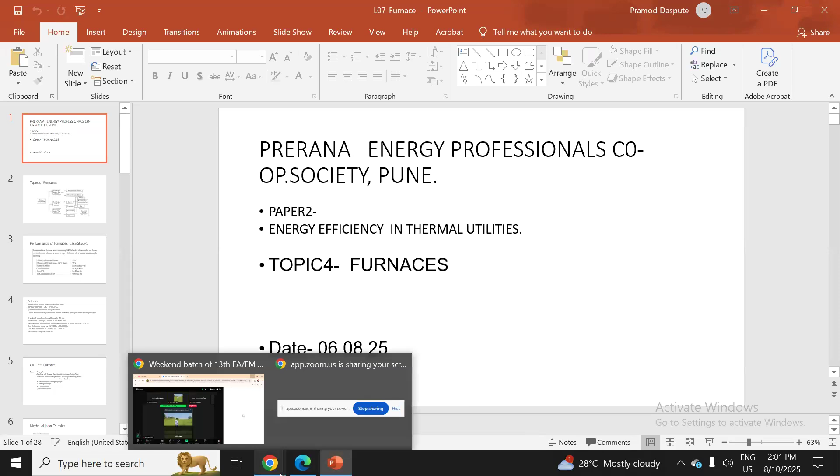Yes, Suresh ji. Hello, I'm audible and the PPT is visible. You are audible too, and the PPT is now visible. Let me know when to start since I have the PPT in front of me. We will wait a couple of minutes because a participant is yet to join. Okay, no issue.

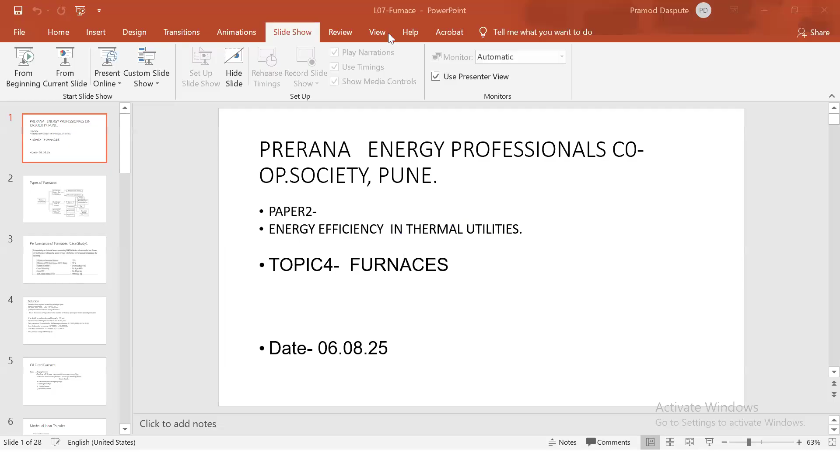Yes, Mr. Suresh, we will now start. Hello. Yes sir, we can start. I think meanwhile the participant will join. Right, right, right, we will start sir.

So today we are going to cover this topic, furnaces, in paper 2. Till this moment we have completed boilers, fuels and combustion, and boiler and steam systems. These three topics we have covered. Now today we are reaching topic 4 of paper 2, furnaces.

I have made it clear in my previous lectures that boiler and furnace are quite identical, except the fluid water is not used and there's no question of steam formation. But you can get very high temperatures. If you take the example of the steel industry, they use electrical arc furnaces called EAF, widely used in steel industry. So all such furnaces can generate a temperature of more than 1500 degrees.

You might remember that steel melts at around 1539 degrees centigrade, what is called the ACM temperature of steel melting, as related to production metallurgy, metallurgical engineering, or material science. If you remember the iron carbon equilibrium diagram for melting of steel, you will get back that steel has to be heated to 1539 degrees centigrade for getting it melted, and again for reshaping it. Scrap melting also needs this type of temperature.

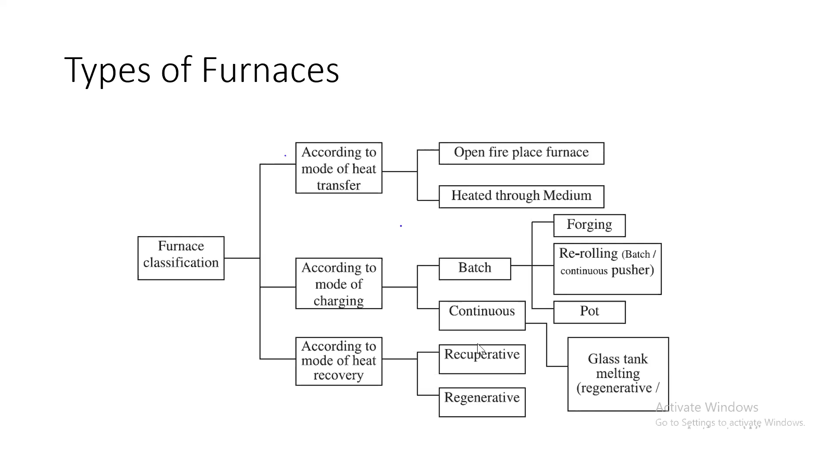So I have initially put up a case study for your reference.

Suresh, many people have joined now. Two, three people have joined. No? Already sir, five have joined. So the total is six. Nice, very nice, very nice. Because I'm starting a case study, so everyone should be able to join it.

Right sir, okay. So this is a case study for furnace, and this is probably a numerical problem asked for around 10 or 20 marks. I don't exactly remember, but mostly 10 marks. And it is a very good question. I liked it, so I attempted it to put in my PPT.

So try to understand this particular philosophy of a furnace, where an electrical furnace is being decided to be replaced with a fuel fired furnace or furnace oil fired furnace. The matter is that simple.

Electrical furnace consumes 50 kWh per batch. For our simple understanding, we can say that is 50 units per batch. So 50 kWh units are consumed in a single batch, and that furnace is to be converted into a furnace oil fired furnace.

So we have to estimate the annual saving when it is replaced with furnace oil, considering the following: the cost of FO, the cost of electricity, the efficiency in both cases - all such data is given here. If it is the electrically operated furnace, the efficiency is 75%. Now if you decide to go for FO fired furnace, the efficiency is 52%.

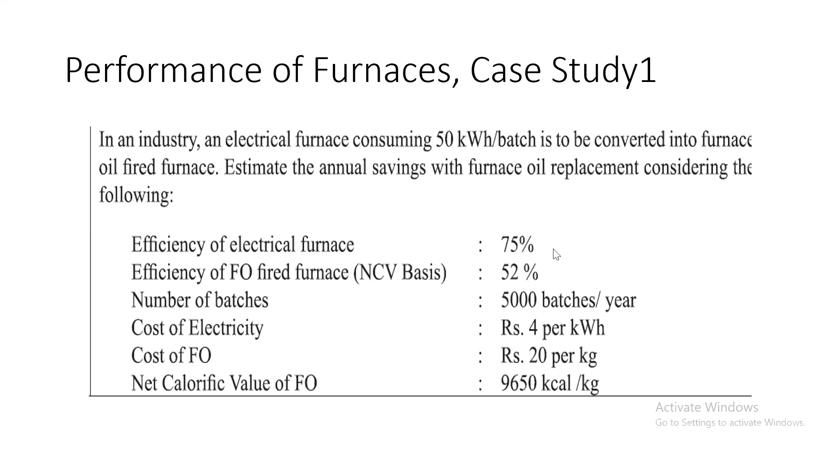Okay, this is what I was trying to convince you. So electrical heat available for melting in kilocalorie per year is 50 into 5,000 into 860 into 0.75. This equals 1.612 into 10 raised to 8 kilocalorie per year. This is the annual heat available to the process.

I have written all the units: 50 kWh per batch, 5,000 is number of batches per year, 860 is the conversion factor to kilocalorie, and the efficiency factor. So you get 1.612 into 10 raised to 8 kilocalorie per year. This is the amount of input heat to be supplied for heating in 1 year for the desired production.

Now the electrical part is essentially over as far as the performance is concerned. The amount of heat input is clear to us, and the amount of heat available to us throughout the year, considering the efficiency part for the process, is now clear. Now we go to the FO part.

For the FO part, you will require this much amount of heat for the process, but efficiency will be 52%. So we have to organize FO such that this much heat is available throughout the year. Though actual heat available is 1.612, the actual heat required for the process is this - we will need to supply this much heat because of the efficiency part.

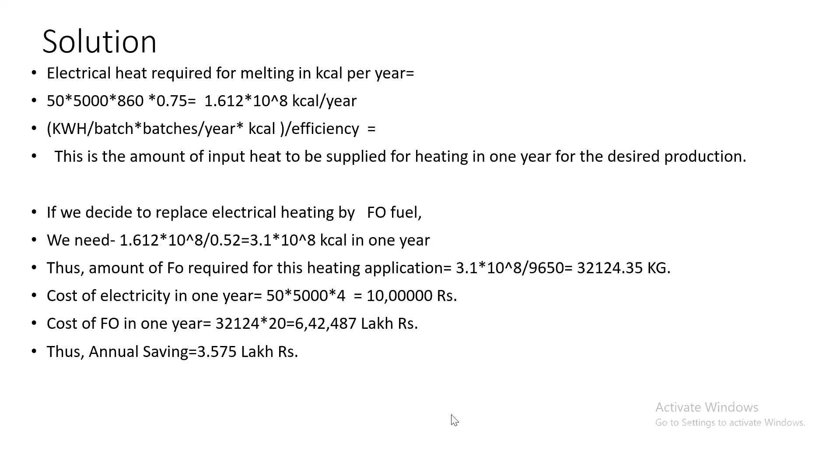Now we will understand various types of furnaces. Actually, all these oil fired furnaces, whether FO or LDO or even CNG, are the types of furnaces used, and there is a detailed study given in the book, but they rarely ask about the working of these furnaces. So I have not repeated all these theory topics, but you can go through the figures given in the book in detail and try to understand how the furnaces work. If you don't understand anything, you are always welcome to ask me your doubts.

So the types of oil fired furnaces used are forging furnace, re-rolling mill furnace, continuous steel reheating furnace. It can be pusher type or walking hearth type, rotary hearth type, continuous recirculating bogie type furnace like a railway bogie, walking beam type, cupola furnace, and induction furnace.

You would remember that this cupola furnace is there even in the high school syllabus for steel melting. In chemistry or physics, they teach that raw iron in the form of pig iron can be melted in a cupola furnace or blast furnace. So that is a basic furnace.

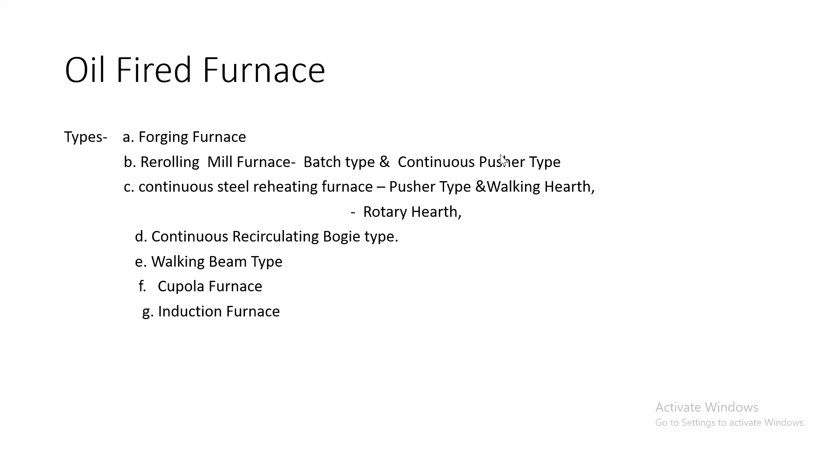We'll go to the modes of heat transfer. One thing we need to be very clear about is that the burner flame has to be very precise, that it should not touch the walls or the roof of the furnace, or even the metal stock which keeps moving on the conveyor.

So let us say above here the steel stock is there, and here the conveyor is there, where the metal keeps moving depending on requirement. So that particular metal to be heated will not directly come in contact with the flame. If it directly comes into contact, the flame may corrode the metal, or damage it, or spoil its properties. So the intention is that the flame of the furnace should not be in direct contact with the metal to be melted.

The main ways in which heat is transferred to the steel in a reheating furnace are shown here. Heat is transferred to the metal stock by radiation from the flame, radiation in the form of electromagnetic waves, hot combustion products, and the furnace walls and roof. So ultimately these walls and roof become very hot because of the high temperature. Then the radiation heat keeps passing, so ultimately the metal keeps getting heated.

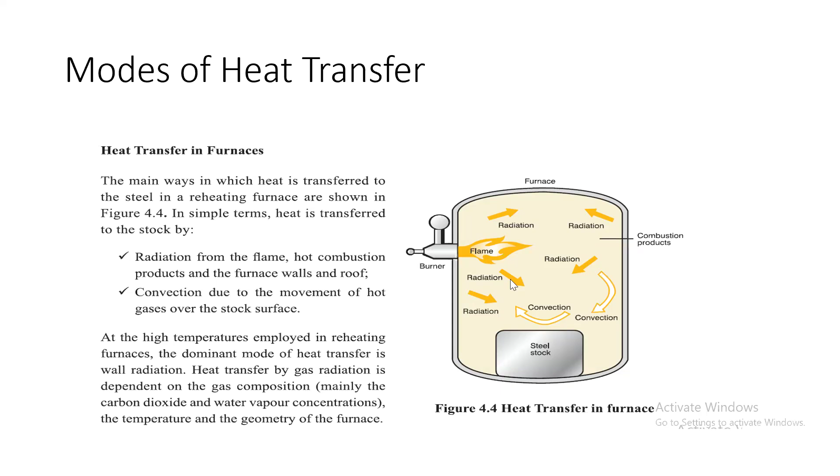Now we will discuss how to find out the performance of an electrical furnace. And here again the things are quite simple. Efficiency is equal to theoretical heat required in kWh divided by actual electricity consumed for melting. So it is equal to HT upon HA, that is theoretical heat upon actual heat.

This formula is very common in a boiler topic also for percentage CO2: the formula of theoretical CO2 percent divided by actual CO2 percent. Same way here, theoretical total heat required for melting divided by actual electricity consumed for melting.

So theoretical heat required for melting is, again the same thing, mCp delta T, which is already well known to us. So m is mass of metal, Wm, or you can say weight of metal, into Cp into delta T, plus H is included. This H should have a suffix called Fg, that is latent enthalpy.

So this becomes a sensible part, where the heat is being transferred from one temperature to another, and latent part gets added with the help of Hfg. So if the latent heat is required for the process, then this H has to be used. And all this, mCp delta T plus latent heat, divided by 3600, will give you your answer in kWh.

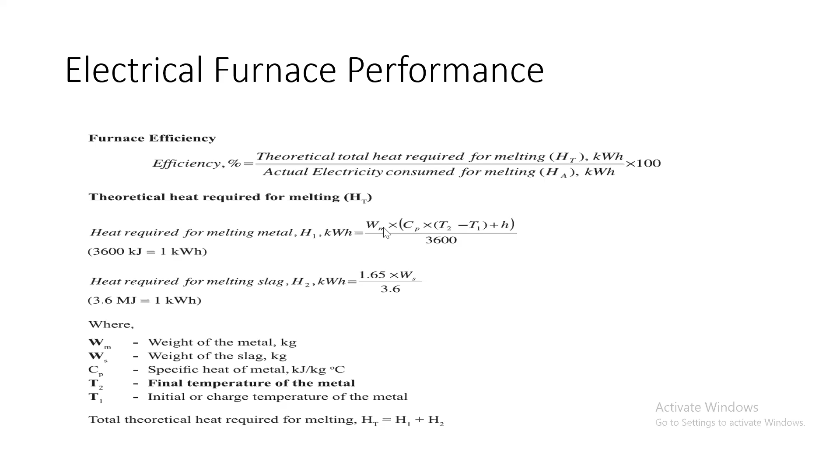That is why the loss in induction furnace is expressed here in percentages, and you can guess that electrical furnace efficiency is somewhere around 70%. The lost heat is approximately 30%, and that analysis is given here.

So electrical furnaces can be broadly classified as induction and arc furnace, such as for steel. For steel, obviously arc furnace is used, that is why the term EAF has come into picture. And resistance furnace is used specifically only for heating, not for melting. This concept should be clear.

When you call it resistance heating, it is just to provide heat up to a given temperature. But if you want to melt, or provide heat till the entire metal gets melted, you have to use induction or arc furnace. So for steel melting, arc furnace is used.

Now the losses in induction furnace - the theoretical energy required to melt 1 ton of steel is around 400 kWh per ton. If you visit steel plants nowadays, every plant declares the amount of electrical energy required per ton of scrap melting. Many cases I have read 420 or 430 kWh per ton, in some cases around 390 kWh per ton. So the theoretical energy required to melt 1 ton of steel is in this range.

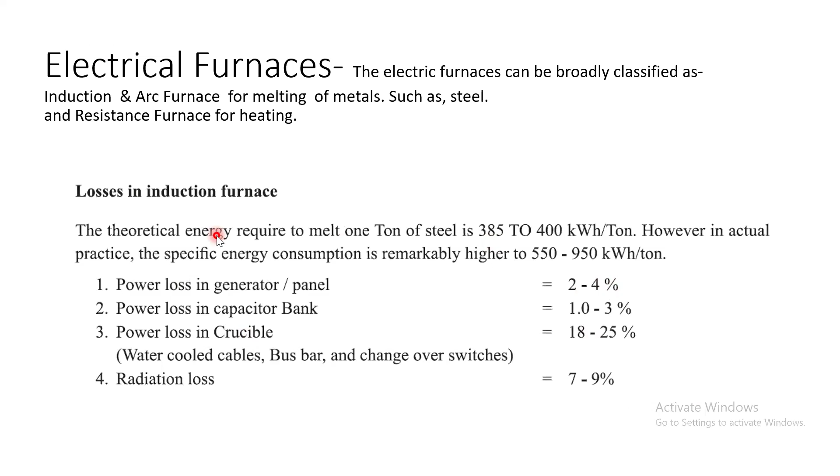Does anyone know what a Sankey diagram is? Any idea about Sankey diagram? Yes sir, yes sir, we have. Very good. Again we may come across the Sankey diagram for furnaces in the next PPT.

Now, performance evaluation of fuel fired furnaces. Why is the efficiency lower in fuel fired furnaces like FO, and why is the efficiency of electrical furnaces around 70%, but for FO, LDO, the efficiency is around 50% or even less? What are those reasons? The stack temperature is quite high, up to 700 or 800 degrees centigrade, and air levels are excess - we know excess O2 is used for combustion, which we have learned in boiler also.

Then capacity utilization is low - suppose if the furnace is capable of melting 1000 kg, but because of restrictions from customers or clients, you could put only 700 kg or 500 kg. So ultimately capacity utilization is up to 70% or 50%, and this low capacity utilization results in low furnace efficiency. High stack temperature also results in low furnace efficiency.

Because that stack gas temperature can be used effectively for preheating the air if you just add one heat exchanger, where heat transfer will take place between the air and the flue gases going to waste.

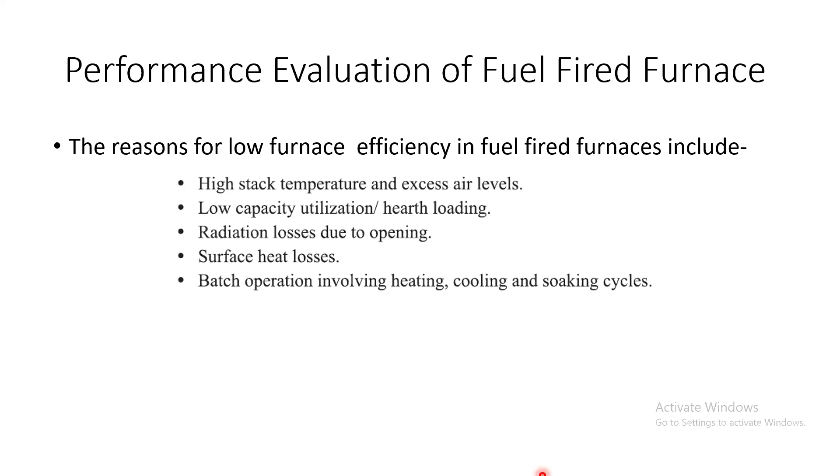Now this is the Sankey diagram which I was trying to explain in the previous slide. I have informed you about various losses in the furnace, which are listed here and shown in this diagram. The gross fuel input given by mass of fuel and calorific value is shown here. This gross fuel input gets reduced to net fuel input because of moisture content. So your net fuel input is this much, and that results into this much available heat, which is further reduced, and that available heat goes to useful output.

Then where is the rest of the energy? This is an accounting of furnaces, so where does the rest of the heat go? The heat goes majorly to the flue gases. We have all come across this in boilers also. A lot of heat is taken away by the dry flue gases, and that is nothing but flue losses. So in every problem of furnace analysis or boiler analysis, we have to find out the percentage of heat loss to the flue gases. This is a major heat loss going to flue gases.

Another heat loss is the loss in the walls. The wall becomes heated, and you find it very hot when you walk across this area because of the wall losses. Opening loss is also well known to you, because while loading and unloading there is a gap in the furnace, and that gap directly exposes the 1500 degree centigrade melting temperature to just atmospheric temperature.

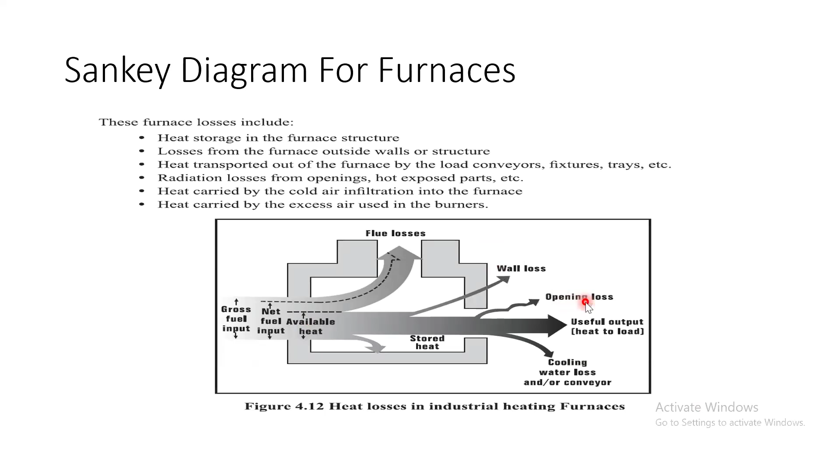So 13 lakh divided by 55 lakh will give you the efficiency of the furnace, which is equal to 25.2%. Now furnace efficiency of 25% means 75% heat is lost, lost to the flue gases, wall, opening losses, and cooling water loss and so on.

This percentage yield means what, sir? Percentage yield, yes, 92%, you are right. Now the percentage yield you are talking of is part B of the problem, this is part A. So this is just furnace efficiency. We will talk about percentage yield in part B. So furnace efficiency is simply clear to you or not? Yes sir, clear.

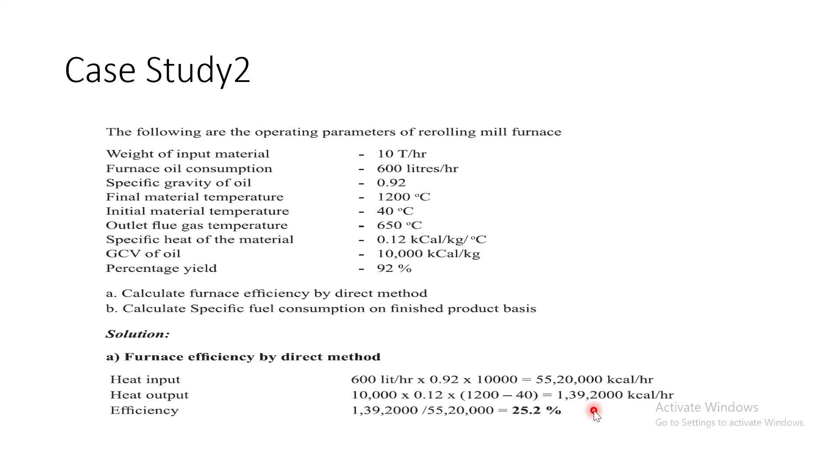Now we talk of specific fuel consumption on finished product basis. Weight of finished products is nothing but 10 ton per hour, and 92% is the percentage yield. So ultimately at the end of the process, though your input is 10 ton, you get melted metal in terms of 9.2 ton per hour. The rest of the 800 kg is nothing but slag, which we studied in the previous slide. So slag has got formed in the balance 8%, right.

Furnace oil consumption is 600 liter per hour, and this liter has to be converted into specific fuel consumption, because 600 liters of oil is required for melting 9.2 ton of effective output material. So 1 ton needs 65.2 liter of furnace oil or FO. This is how specific fuel consumption on finished product basis can be worked out. Try to understand the meaning of each term involved. Finished product is 9.2 ton per hour, which is considered here, and specific fuel consumption is nothing but 600 liters per hour, and we wanted the answer in liter per ton.

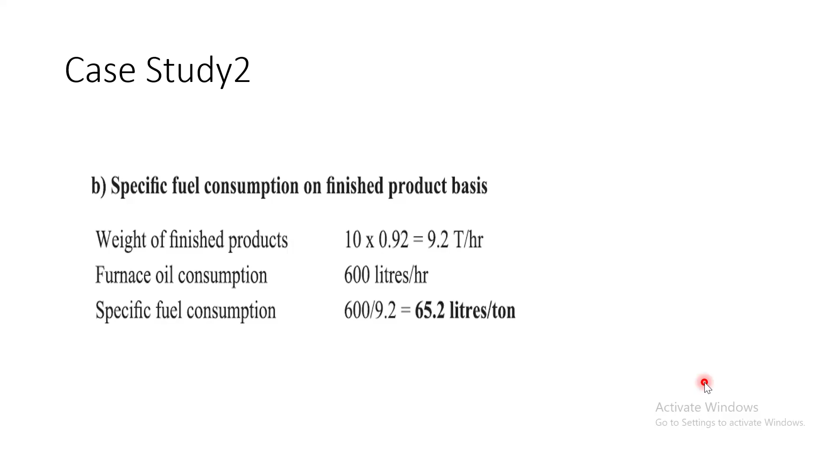Now this is one more practical slide which I specifically decided to introduce: measuring instruments for furnace performance. What are the various instruments used when you work for furnace efficiency measurement? What are the performance measurement criteria? We'll try to understand all these one by one.

Furnace instrumentation: what are the parameters to be measured? Furnace soaking zone temperature, and other parameters, are measured at specific locations. These are the instruments that are required, and the expected values are in this range. So what are the major parameters measured when furnace performance is to be measured? This is how the problem statement gets formed with the help of this particular slide.

Now you want to know the furnace temperature of the reheating furnace during soaking or during other operations. If you want to measure at the soaking zone, the location of measurement is the soaking zone side wall. If you want to measure at some other location like the input side or exit side, then that side's temperature has to be taken at that particular location. The instruments required are platinum or platinum-rhodium thermocouple with indicator and recorder. It will indicate the temperature at the required location, and it will also be recorded.

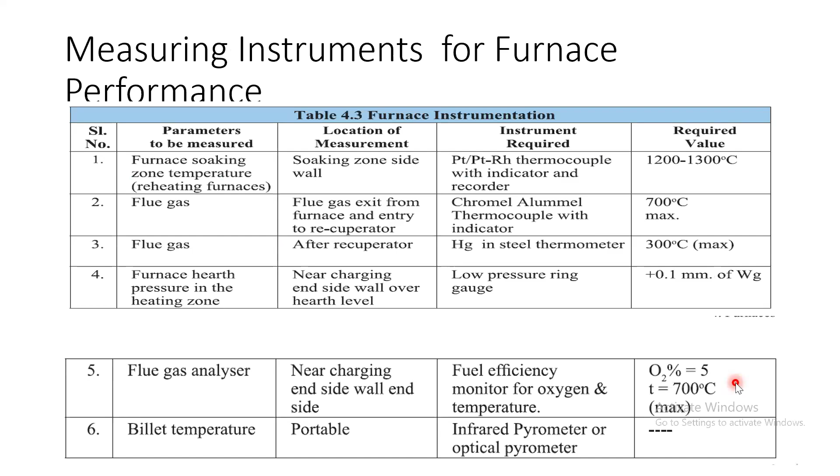The first measure is complete combustion with minimum excess air. I already told you that O2% should be much less than 5, around 3 to 5%. So that is the first measure - complete combustion with minimum excess air. Second is uniform or correct heat distribution. Third is operating the furnace at the desired temperature.

Then, reducing heat losses from furnace openings, and maintaining the correct amount of furnace draught. Draught is already known to you now - or should I explain what is draught?

Yes, think. Draught is known, no? Not known, sir. Not yet come, sir. Okay, okay.

Draught is very well required in furnaces, and boilers - both. So draught means what? The difference of pressure between the flue gas exit and the flue gases when they are inside the chimney. A draught is created when suddenly the flue gases go out to the atmosphere. So the pressure of the flue gases while going out of the chimney, and the difference in pressure when the flue gases go out of the chimney versus when they are inside the chimney - that pressure difference is called draught.

That is why the words FD fan and ID fan come into picture. ID fan is induced draft fan, FD fan is called forced draft fan. That draft word has come into picture because of the furnace draft.

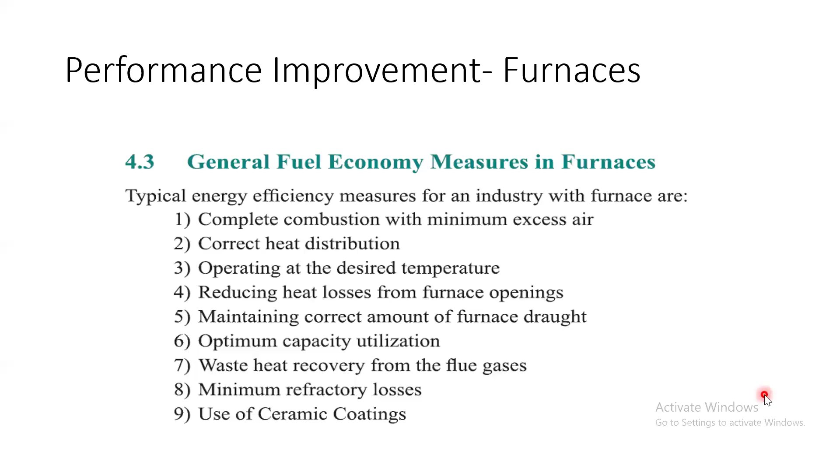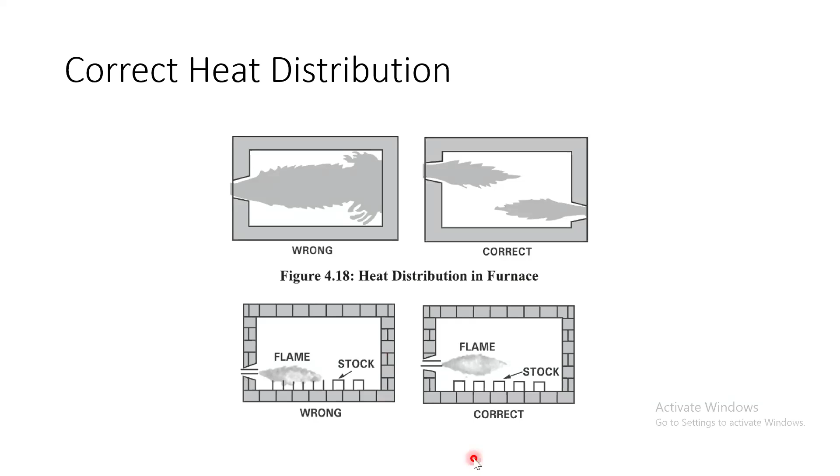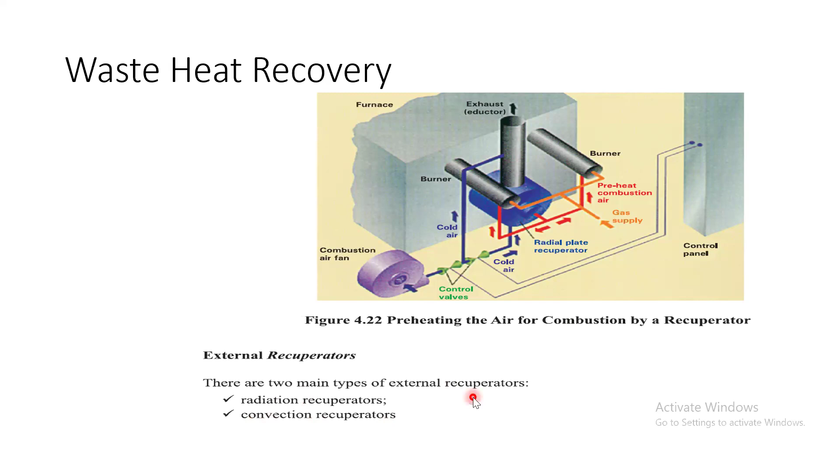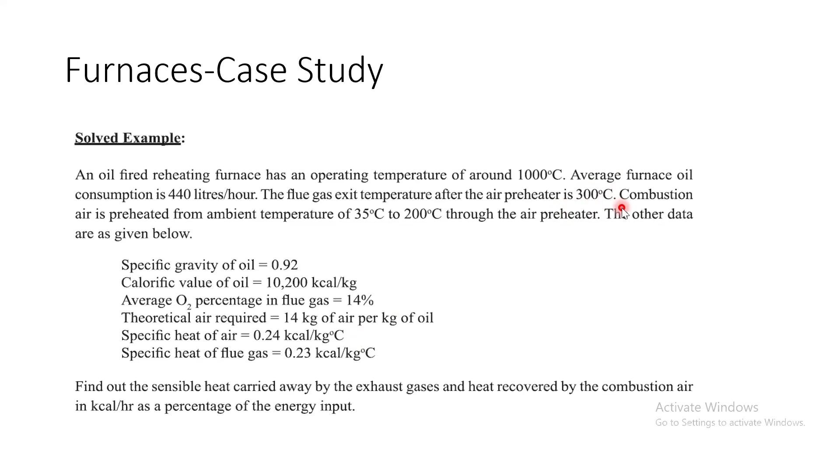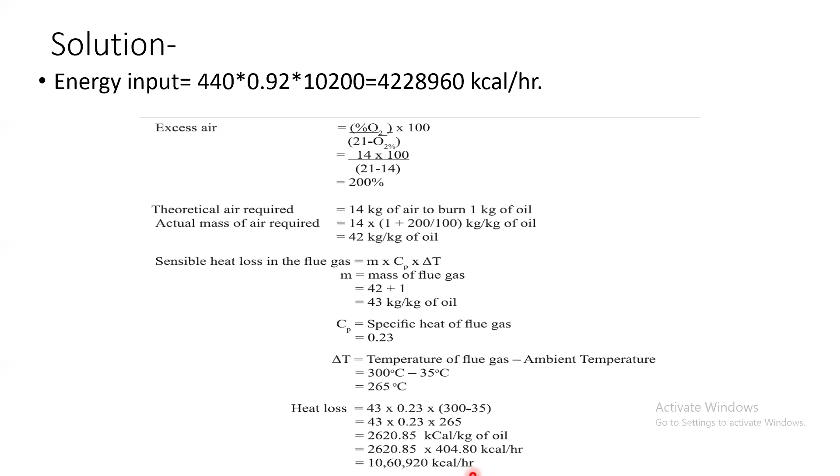That is why, in order to take advantage of the heat going out of the flue gases, they have decided to preheat the combustion air, which is preheated from 35 degrees up to 200 degrees. So you could save this much amount of heat out of 10 lakh kilocalorie going every hour.

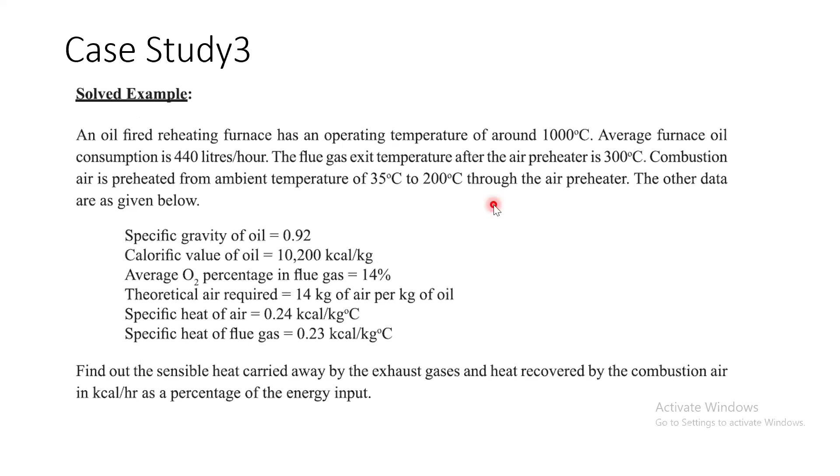Okay sir, I have three more case studies. We will go one by one. If all these three case studies are clear to you, the next will be easy. If there is any doubt, you can ask me.

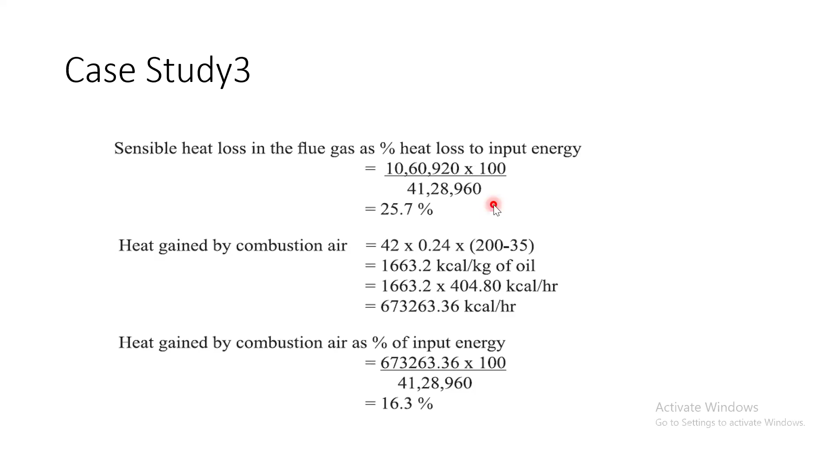I will purposely not open the next slide, and I will expect your answer to this question. Now here the concept is very clear: mass of stock is known to you, 10 ton per hour, CP of stock is given, delta T of stock is given. So you can find out MCP delta T as the heat output required, and heat input supplied is the mass of fuel, which is given to you, along with the calorific value.

Please try to find out the efficiency - your answer may be wrong. I will wait for 2 minutes. It is an objective question of 2 marks asked in the exam. If there is any doubt, you ask me, but I will not open the answer slide.

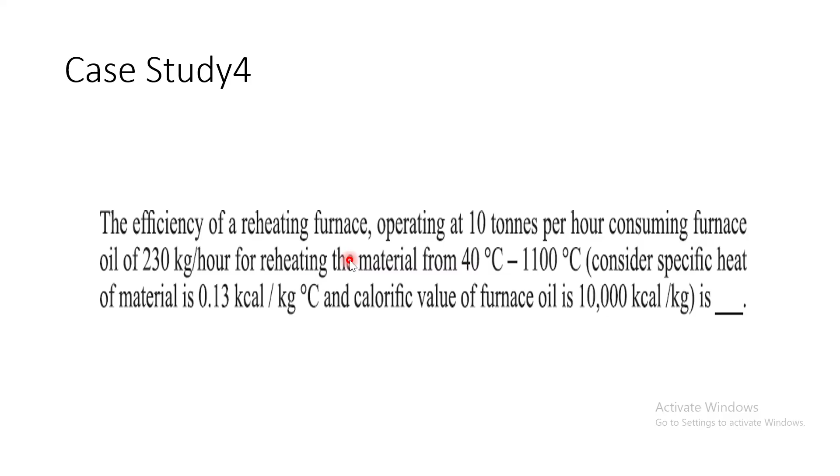Is it okay? Yes sir, can we go ahead or is someone not able to get the answer? Everyone is okay with 59.91%? Yes sir, yes sir. Those who could not get it, who have got some doubts, can see this slide for a minute, then we'll move ahead, okay? Mass of stock are the variables.

Okay, now we go to case study number 5. The efficiency of a billet heating furnace with an output of 15 ton per hour was 32%. Now efficiency is directly mentioned in this problem. Find out the specific fuel consumption in liter per ton of billet heating and total fuel consumption per hour as per the data given below. Now again it is clear that the output mass to be operated in the furnace is 15 ton per hour, and delta T for that metal to be processed is this, that is 1100 degrees centigrade, and that billet has got specific heat equal to this. So ultimately output heat required is equal to 15,000 into this difference into 0.12.

Is it clear? Now density of furnace oil is 0.95 kg per liter and GCV of furnace oil is 10,000 kilocalorie per kg. So this all is related to the furnace oil, these two parameters, and the efficiency is already mentioned. So ultimately you have to find out the mass of furnace oil being used for the process, and that has to be converted into the answer. If you get it in liters, that has to be divided by ton of billet, that is 15. So ultimately you will find out specific fuel consumption in liter per ton and then total fuel consumption per hour. So this is how you can solve this problem.

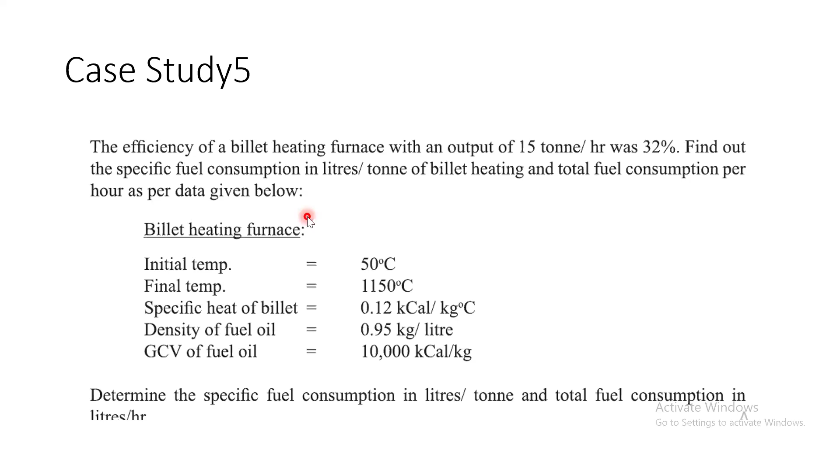And then there is one more question asked by them: total fuel consumption per hour. Have you found out fuel consumption per hour? Fuel consumption per hour is already found out: 618.75 kg per hour, isn't it? Yes, sir, that is already found out.

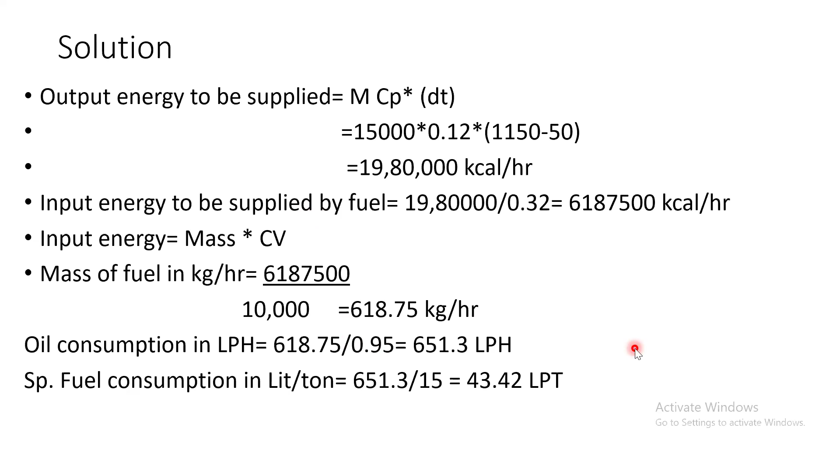Output energy to be supplied, that is important, sir. Now this problem is clear to you all? Yes, sir. Then we go to this case study number 6.

We have 6 cases to be solved. Now this is case study number 6. A furnace output is 5000 kg per hour of billets. Thermal efficiency is claimed to be 25%. Specific heat of billet is 0.12 kilocalorie per kg degree centigrade. Billet enters the furnace at 40 degrees centigrade and leaves at 1200 degrees centigrade. Calculate the hourly consumption in liter of furnace oil if GCV of the oil is 9200 kilocalorie per liter. I think this problem is not at all difficult.

If you have any difficulty, please ask me. Furnace output is 5,000 kg per hour, thermal efficiency is given. So output energy to be supplied: output energy is equal to MCP delta T. Mass 5,000, CP is 0.12, delta T is 1200 minus 40 equals 1160.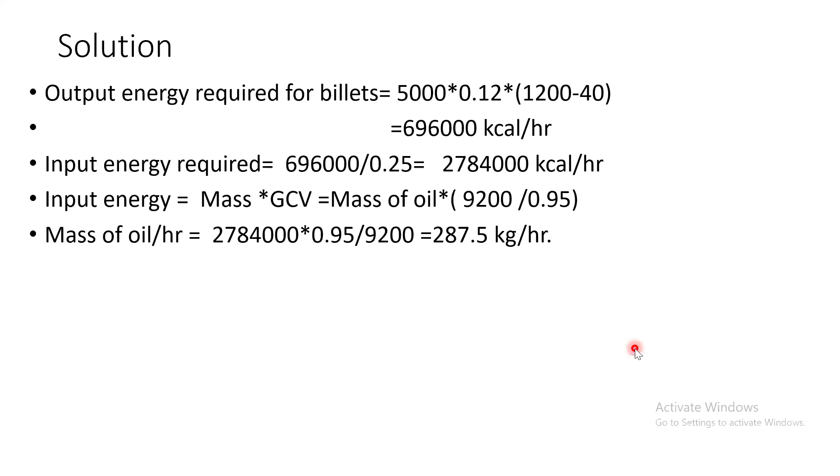Sir, this 0.95, where is it given in the problem? 0.95? No, it is assumed, density of furnace oil is 0.95. You can assume even 0.92 also, no problem. When it is not given, you have to assume it.

This problem is actually unsolved in the book. All unsolved problems in the book I have taken as case studies for your convenience, because solved problems you can copy from the book and solve them directly. But I have purposely taken unsolved problems so that your concept will be totally clear. So these are all unsolved problems, and they are expecting you to assume density of furnace oil as 0.95.

Sorry, specific gravity of furnace oil equal to 0.95. And you can clearly write, in such case we have assumed this 0.95 as the specific gravity of furnace oil. You can clearly mention that.

But if our assumption is not 0.95, suppose it is 0.94 or 0.9, then the answer will be different. All different answers are in the same range, and they accept all answers from 0.91 to 0.99 as correct. There is no accurate answer in all these exams. You must have a clear cut idea of the entire situation, that is what is expected.

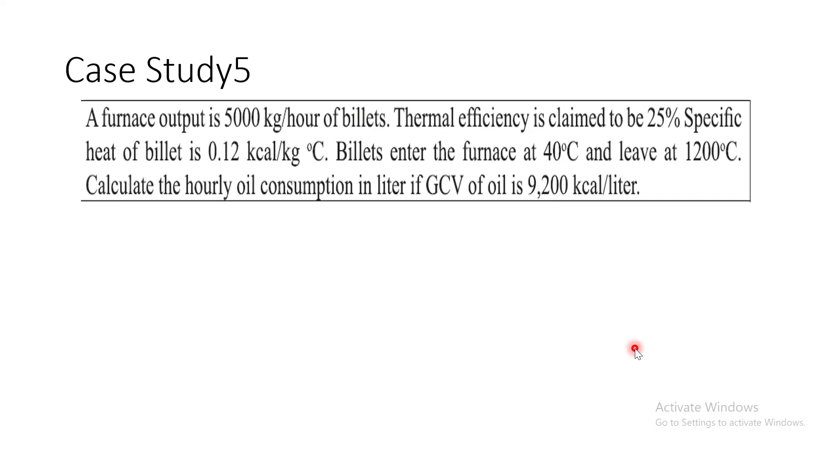Because you have been given NCV of furnace oil, liters has to be converted to kg. That is why specific gravity is also given to us.

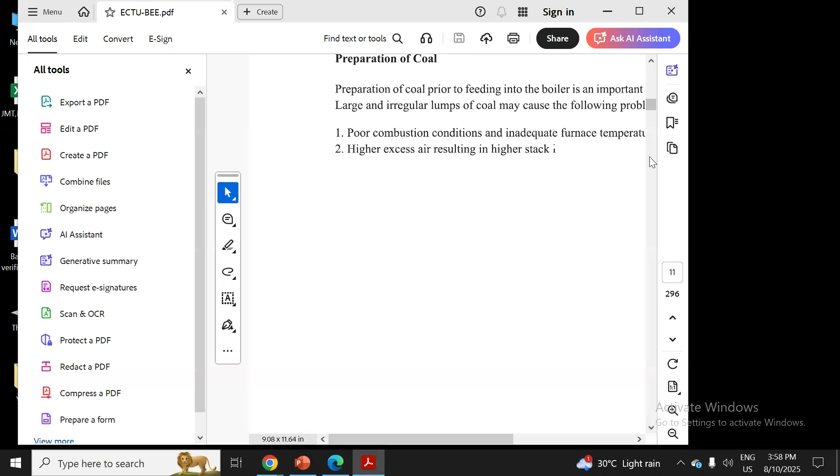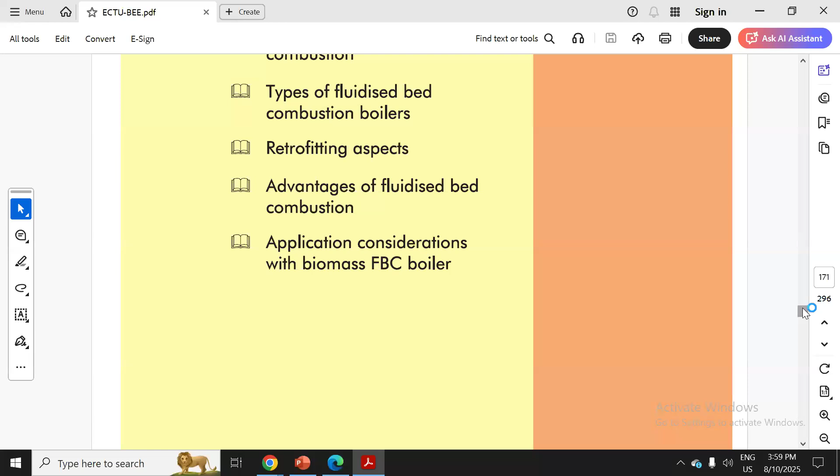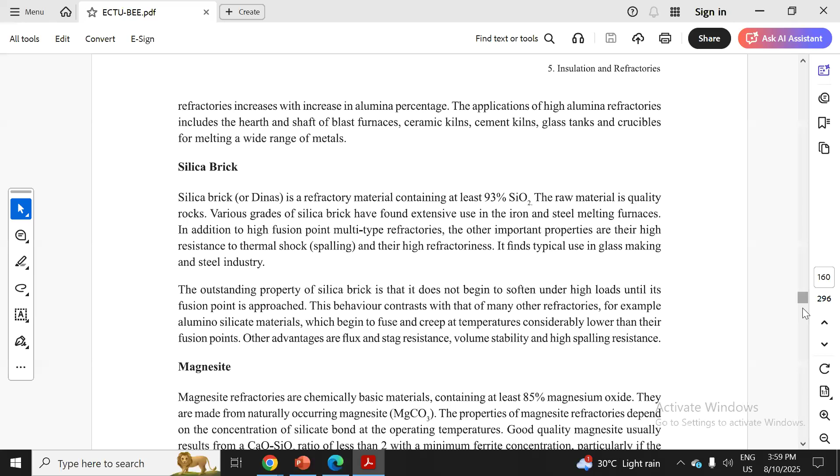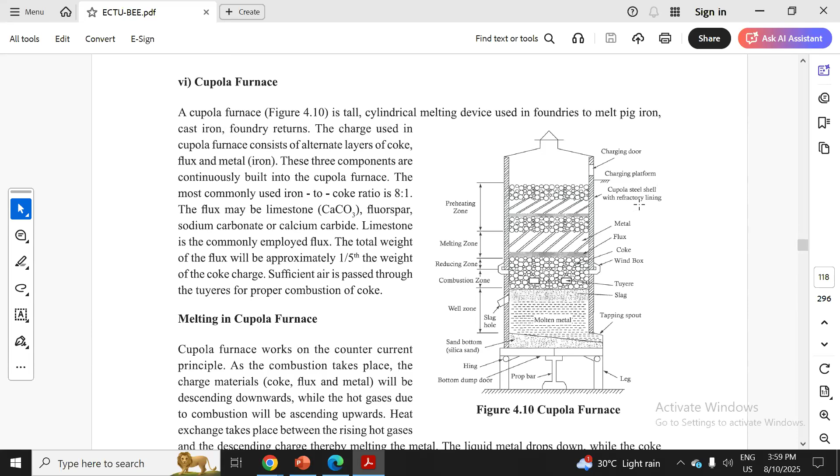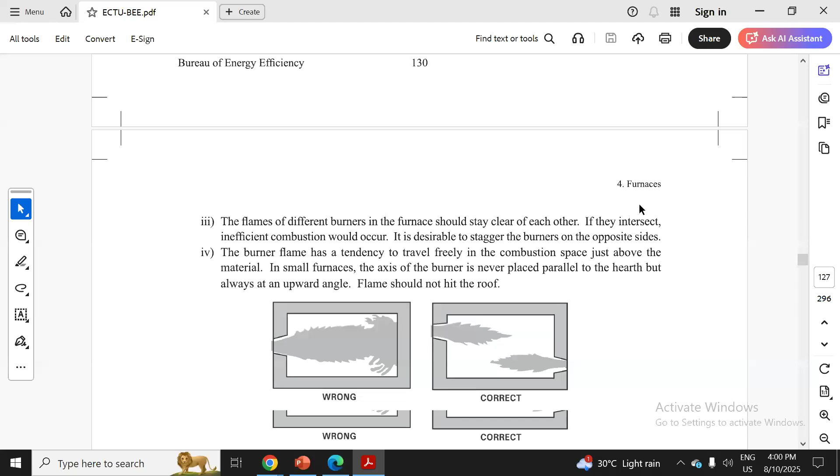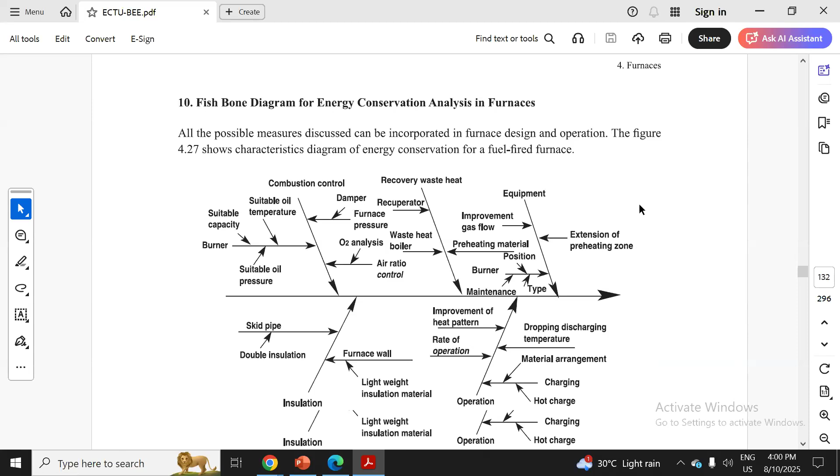Emissivity of ceramic coatings used in furnace - is it right? Yes, sir, you are all able to see and everything. Okay, so the question is: Emissivity of ceramic coatings used in furnace...

Is this topic 4? Same thing, sir, four only. Correct. Emissivity of ceramic coatings used in furnace decreases with increase in temperature or increases with increase in temperature. Ceramic coatings are particularly preferred for high temperature applications in furnaces. So ultimately, emissivity increases with increase in temperature.

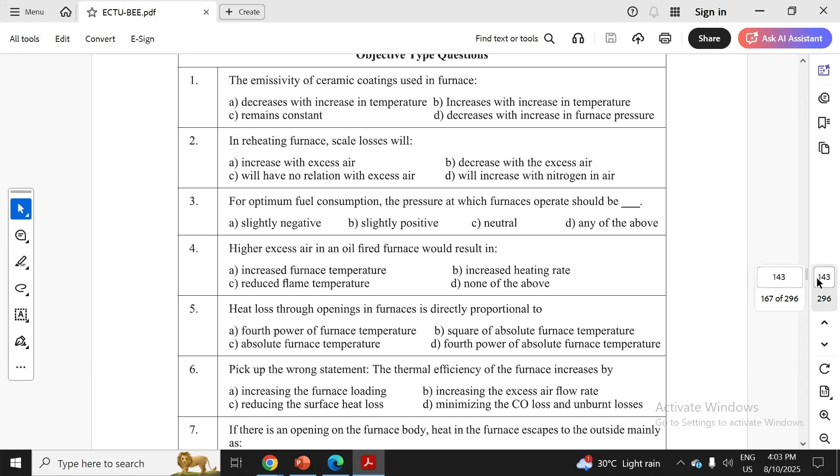Fourth power of absolute temperature, no sir? Fourth power of absolute temperature - absolute, including that 273 plus. Correct.

Next: pick the wrong statement. Thermal efficiency of furnace increases by reducing the surface heat loss, or minimizing the CO loss and unburnt loss - that is also correct, most correct. You have to pick the wrong statement. Increasing the excess airflow rate - very correct. B is correct.

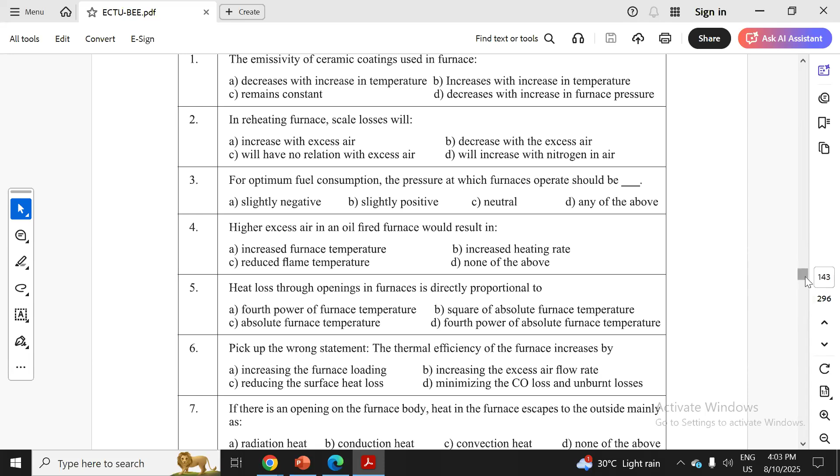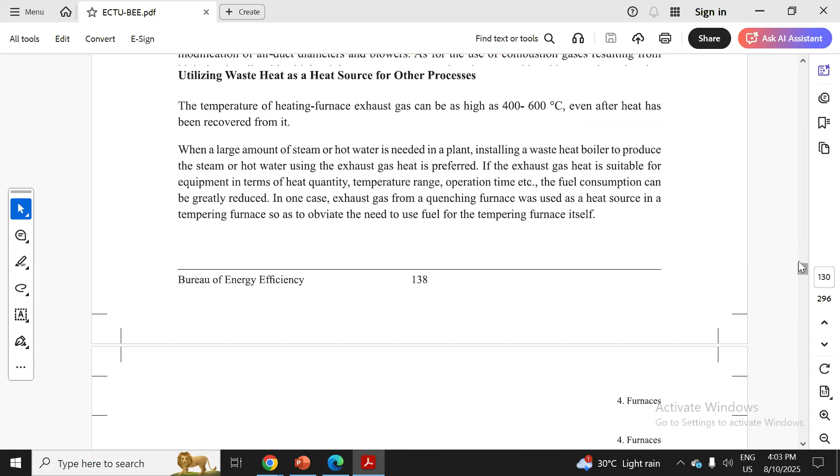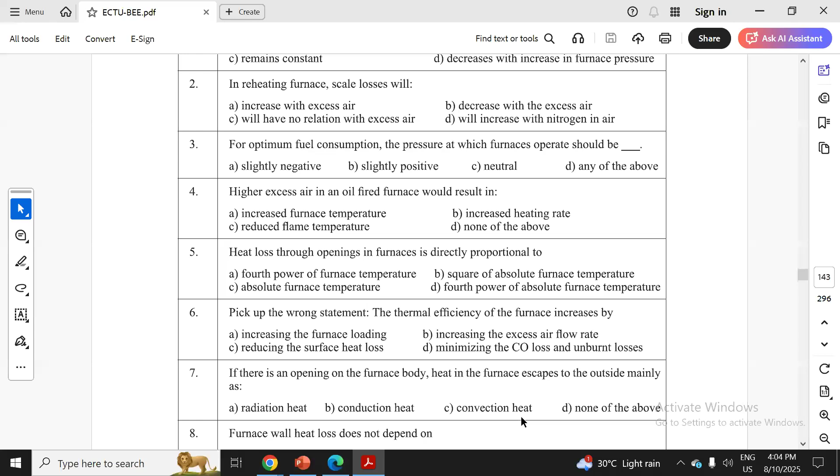B is wrong - sorry, I have to find out again. If there is an opening in the furnace body, heat in the furnace escapes to the outside mainly as radiation heat. Right, because the heat inside the furnace goes out as radiant heat, since heat transfer is through electromagnetic waves. Furnace wall heat loss does not depend on stock to be heated.